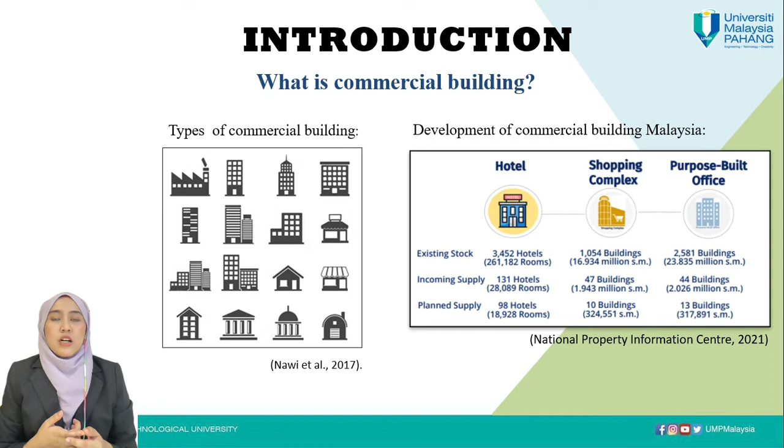The importance of commercial buildings is that they can improve the living standards of society and economic growth. By increasing commercial buildings, there will be urban development in that certain area, which is why the living standard of society is improving as many facilities can be used.

Design is a very important part of project development and has been proven to influence building construction. So what is design risk? Design risk is the potential for a design to fail to satisfy the requirements for a project. A problem can arise from the design stage or even in the construction stage due to design error.

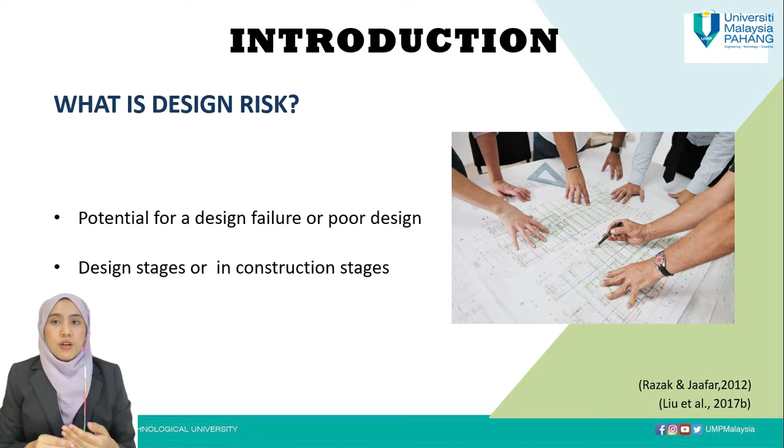There is a case from an article by Azily. It mentioned that one commercial building, the Hotel New World, collapsed, and the main cause was found to be a terrible error in the original design by the engineer due to inappropriate design. Because of that, it harmed people's lives - 33 people were killed.

Another potential impact stated in a few articles is that any errors or omissions can lead to design changes, causing cost overruns, schedule delays, quality issues, or even project failure. Therefore, identifying the chance of successful design in commercial buildings is important to the commercial sector, economy and society in order to avoid such impacts in future.

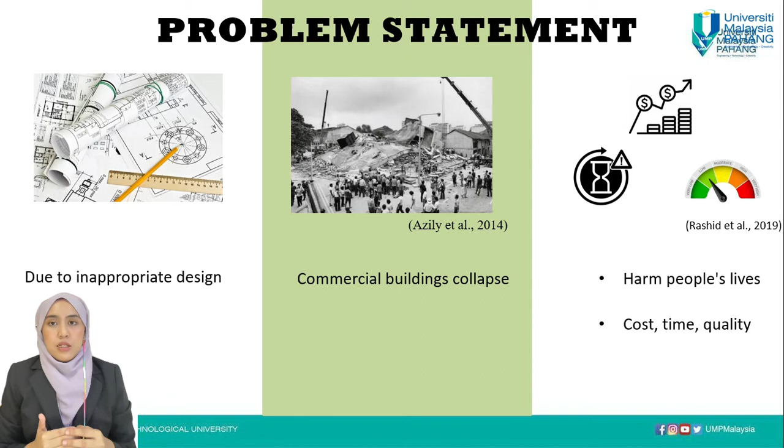Due to that, it is crucial to explore the design risk factors of commercial buildings in Malaysia.

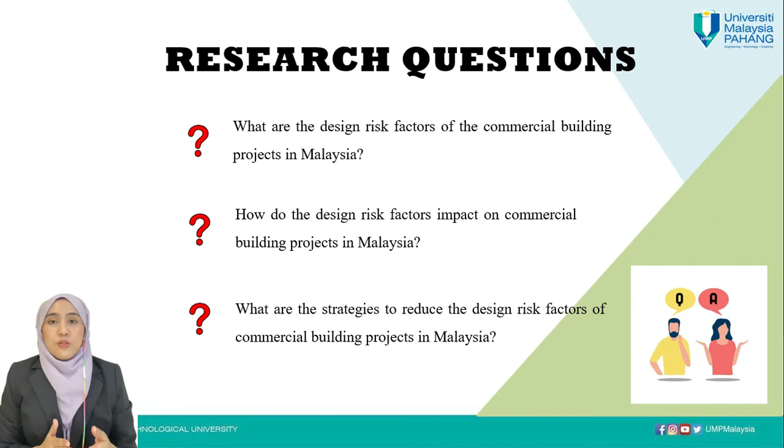Here are the research questions I came up with. First, what are the design risk factors of commercial building projects in Malaysia? Second, how do design risk factors impact commercial building projects in Malaysia? Third, what are the strategies to reduce the design risk factors of commercial building projects in Malaysia?

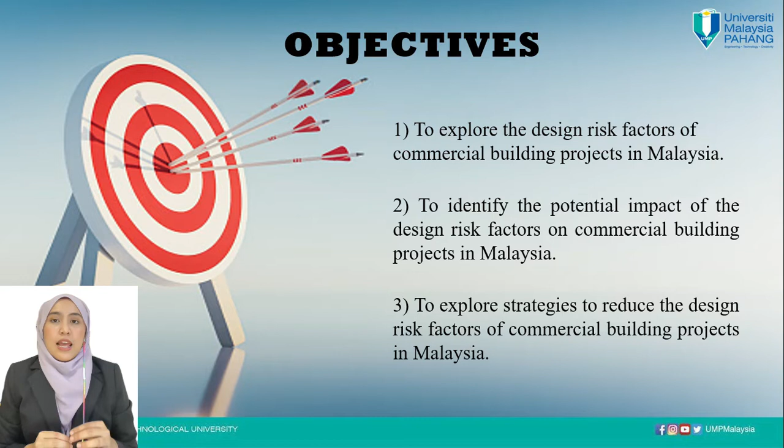From the research questions, it answers my research objectives. The first objective is to explore the design risk factors of commercial building projects in Malaysia. Second, to identify the potential impact of the design risk factors on commercial building projects in Malaysia. Last but not least, to explore strategies to reduce the design risk factors of commercial building projects in Malaysia.

The method for the research is a semi-structured interview, covered in Malaysia. The respondents are C&S engineers, consultants, contractors and government sectors, within commercial building companies. There are 5 articles most significant to the topic, and all findings relate to commercial buildings.

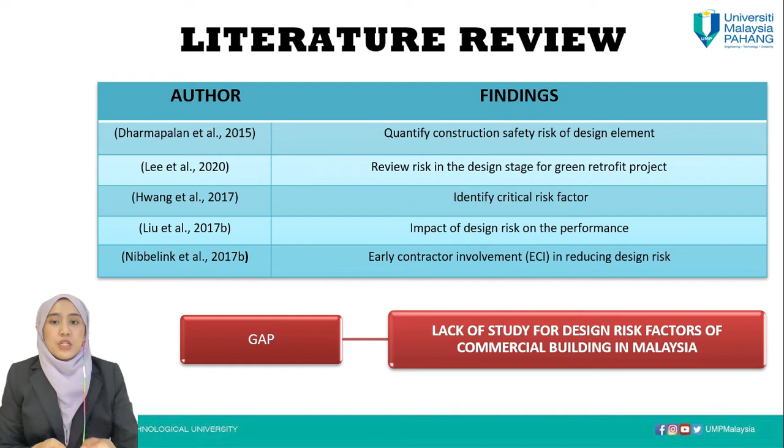From all this literature review, it can be concluded that there is still a lack of study on the design risk factors of commercial buildings, especially in Malaysia.

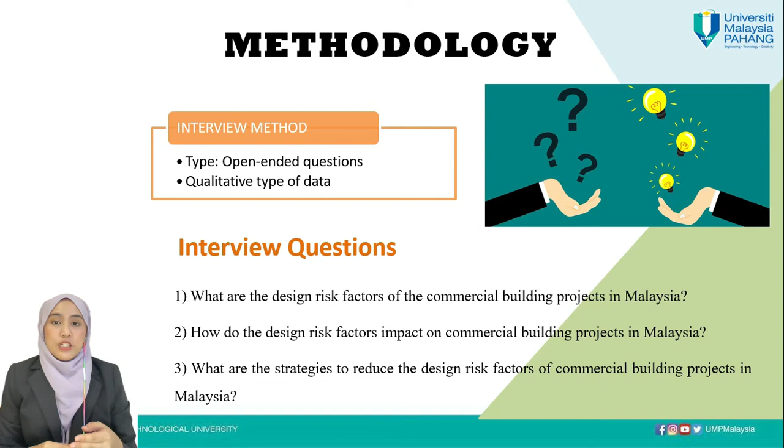The method I conducted throughout this semester's research used interviews, with open-ended questions producing qualitative data. Here are the questions for the interview session to answer all the objectives of this study. After designing the open-ended questions, I contacted target respondents from LinkedIn and CIDB websites. Once a respondent agreed, I set the interview appointment with them.

Then I proceeded to conduct the interview session. The platform I used was phone call, with open-ended questions. The interview lasted 15 to 20 minutes depending on how the respondent answered. After the interview session, I summarized it and sent it back to the respondent. Once the respondent agreed, I proceeded to analyze the data.

The type of data analysis I used is thematic analysis. From the qualitative data I got from respondents, I transcribed it into text form and summarized the data. From that, I generated initial codes from the data in Excel and identified patterns to generate subthemes, and lastly generated the themes. The data can then be concluded, and I can continue to generate the report thesis.

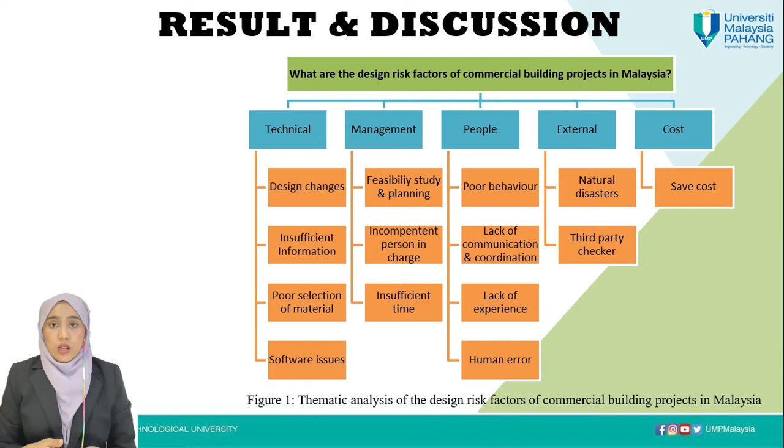Based on the interview data, human error is the highest total number of hits under the theme of people, which is 14 respondents responding to human error. As you can see, I already highlighted this from the table of the total number of hits for the design risk factor of commercial building projects in Malaysia.

Examples of human error are poor traffic design, forgot to include seismic analysis, design not detailed enough, inserting wrong values on software, and most of them said that the designer used inaccurate load consideration for commercial buildings.

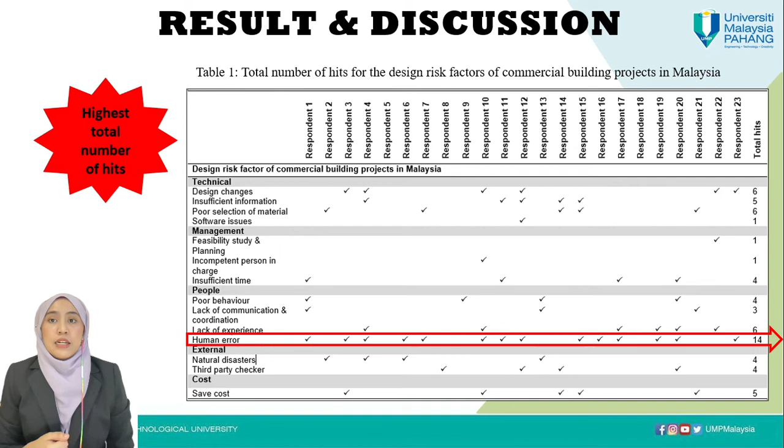For objective number 2, which is to identify the potential impact of the design risk factors of commercial building projects in Malaysia, there are also 5 themes: performance, reputation, technical, surrounding, and cost and time.

The sub-themes under performance are structure failure, quality, and crack failures. The themes of reputation consist of profit loss and negative reputation, while for technical it consists of maintenance works. After that, for surrounding, the sub-themes are traffic and effect on safety. Last but not least, delay and cost increase under the themes of cost and time.

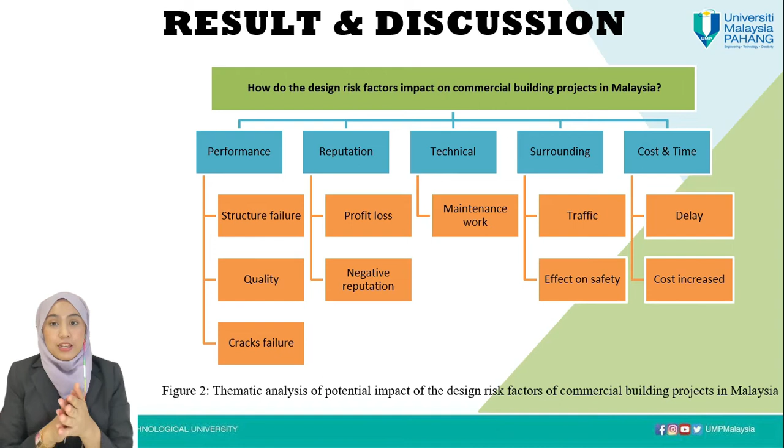As you can see on the slide, I already highlighted that 12 respondents said structure failure is the highest total number of hits. Examples of structure failure include leading to ultimate limit state and serviceability limit state failure, structure integrity, deflection on infrastructure, and the worst case is the building can collapse.

The rest are sub-themes of profit loss, negative reputation, and traffic impact.

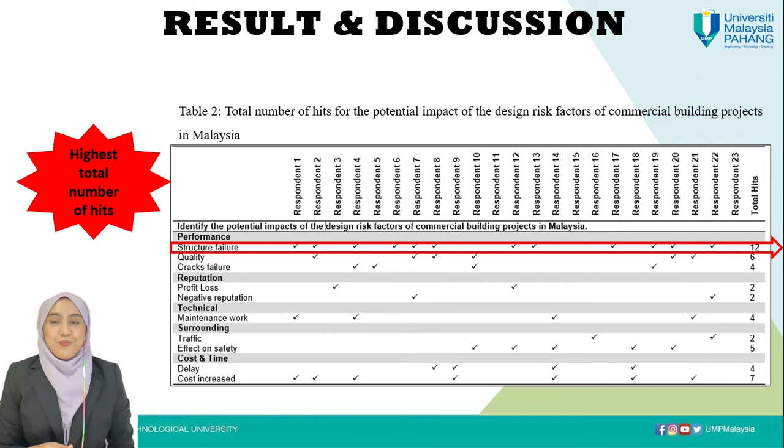Let's move on to objective number 3, which is to explore strategies to reduce the design risk factors of commercial building projects in Malaysia. For strategies, this part also contains 5 themes, which are technical efficiency, education, people, management, and external actions.

Technical efficiency consists of technology and software implementation, safety and design standard requirements, and sufficient information. For education, the sub-themes are exploring new things, up-to-date technology, and awareness. Under the theme of people are communications, experience, competence, and expert review, and the themes of management are role and responsibility and dateline. The fifth theme is external action, with the sub-theme being law and regulation.

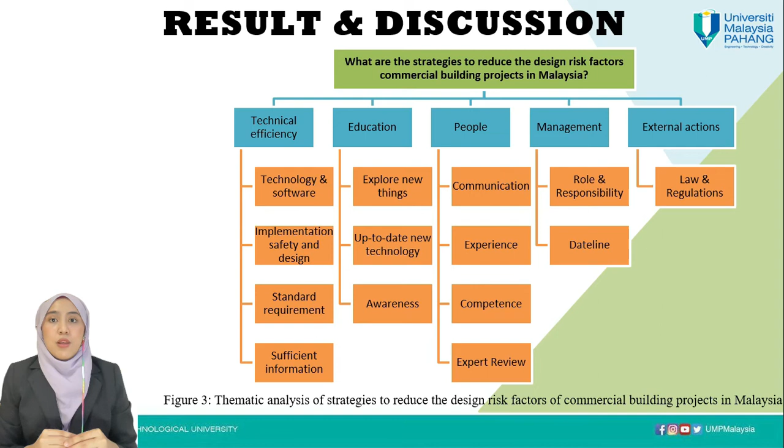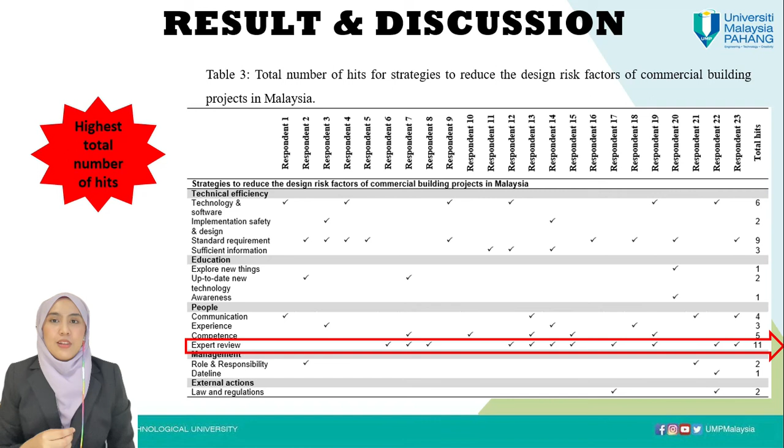The highest total number of hits is expert review. An example of expert review is that junior engineers need to get guidance from senior engineers as they do not have experience designing commercial buildings, and others mentioned hiring an independent checker to check the design or review the drawing.

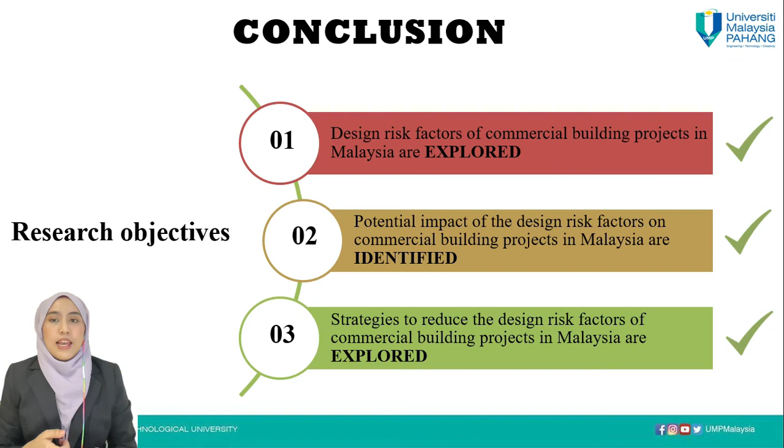In conclusion, all the research objectives of this study are achieved, the first, second and lastly, by using the method of interview with 23 participants from civil engineers, consultants, contractors and government sector, analyzed using thematic analysis.

The outcome of this research can act as a guideline or reference for relevant parties in the construction industry regarding the design risk factor, potential impact, and strategies to reduce the design risk factors, to improve and enhance design quality in order to produce good commercial buildings in Malaysia, and implement the strategies as they already know the design risks they might face.

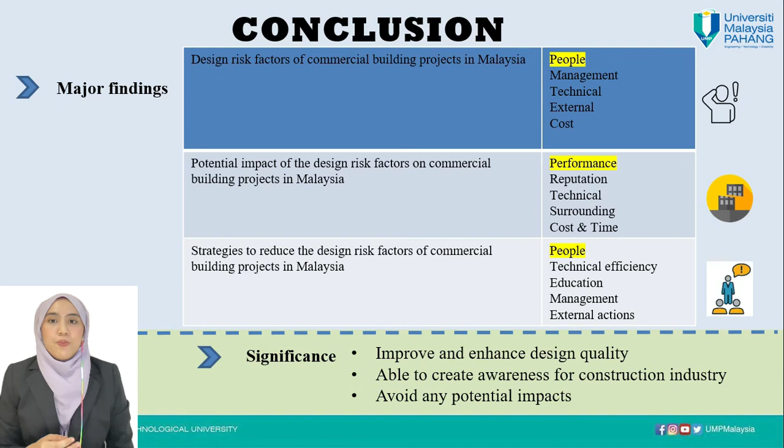Other than that, these findings are able to create awareness for the construction industry to avoid any potential impact that can happen in the future. This study will benefit future researchers as they can use it as a reference and generate ideas to expand community knowledge about design risk factors and the potential impact and strategies to reduce them.

For the industry, they can develop strategies to minimize and avoid design risk in the construction industry that might occur, as this research proposed a few strategies that can be implemented for industry benefit in the future.

Future researchers can make several improvements to this research. For data collection, they can find more respondents for the interview method, so there will be multiple answers and more perspectives from different people.

Other than that, they can use other methods, for example questionnaire surveys, and also cover more themes other than design risk factors, impact and strategies to reduce the design risk factors of commercial buildings in Malaysia, so they can produce more detailed and specific answers.

Other than that, they can perform a new study. The research can further investigate other risk factors, including construction, operation, and maintenance risk factors.